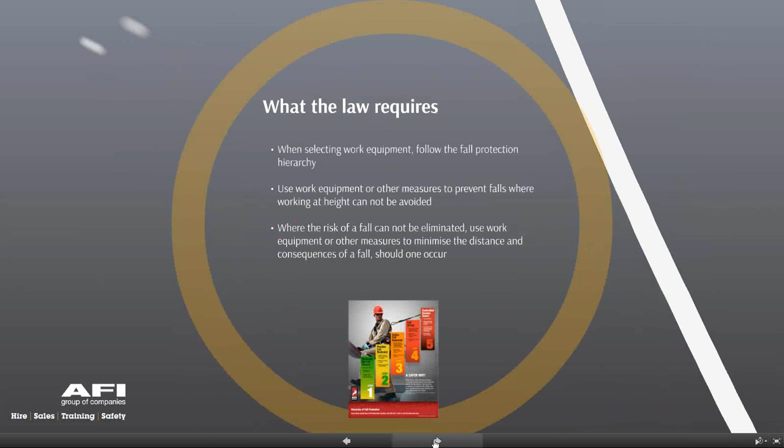So in a nutshell, MEWPs are considered to be a piece of equipment which can prevent a fall. The law states that we must use work equipment or other measures to prevent falls where working at height cannot be avoided. You might be familiar with this new hierarchy picture that's sometimes shown around, or the version that's in a triangle. Irrespective of what it is, we need to understand the hierarchy in its order.

Falls from height are associated with more fatal and major specified injuries to workers than any other kind of injury. That's fact. In the UK alone, in 2013-2014, falls from height were the most common cause of fatalities and the second most common cause of major specified injuries, accounting for over 567,000 lost working days. So massive figures of people not being able to go to work because they've fallen from height.

So, PUWER then, or what we know as the Provision and Use of Work Equipment Regulations. This focuses on minimising the risks from using work equipment. Previously within PUWER, we've referred to areas such as suitability of the equipment, guarding of dangerous parts of machinery. But interestingly, this new guidance now highlights such areas as ground conditions, sloping ground, travelling whilst being elevated, and potential for drop-offs or changes in level.

Quite a different change in tack there from the HSE. They're basically telling you, if you've got these kind of environments around, you need to consider these. Sometimes the environment in which MEWPs are used will constitute a risk. We could be on good ground one minute, then suddenly find ourselves on soft or uneven ground. This can have catastrophic consequences if the machine is not designed to be in this type of ground.

So what are your spill procedures? Have you got procedures in place that are going to prevent that from getting into any type of water course? Also, under LOLER, they do mention the fact that all lifting equipment must have a thorough examination, and that thorough examination for MEWPs has a maximum interval of 6 months.

We talk about strength and stability, and if you look in the LOLER regulations, it will give you a good example and specific legislation on what it means there. We need to ensure that the machine is stable and strong enough. Again, we talk about this competent person, somebody with the training, knowledge and experience. But remember what CDM said if you're in a construction activity. So a little bit different take on that.

In the UK, there are over 55,000 MEWPs. These are all different, from different manufacturers, different ranges, types and models. Some have an ability to work only indoors, where some can go outdoors. So each manufacturer, understandably, is attempting to develop new machines with different configurations, different applications and uses all the time.

Can't blame them for trying to get a competitive edge on the companies they do business with. What we're now seeing is technology working in the manufacturer's favour. Instead of relying on the weight of the machine, heavy robust equipment, they're now relying on safety systems for various aspects. So instead of a really heavy, clunky machine, we've got a lighter weight machine that relies on a safety system. In the 20 plus years I've been involved with the safe use of MEWPs, technology in the last 5 years or so has moved on somewhat, and it's moving on still at quite some pace.

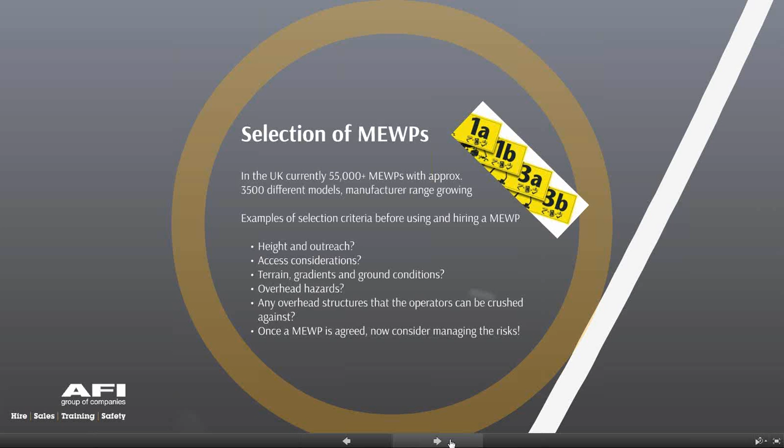Okay, so you've decided on your machine, accepted the fact that this machine is going to be arriving on your site. It's been loaded and you're having it delivered to your location. So this in itself can involve a whole host of manner of issues. Think about the length of the machine, the height of the machine, the width, the weight. This can cause havoc whilst it's being unloaded.

Okay, is there room for the transporter to park up and safely unload? Remember that the delivery driver, when they arrive, under many terms and conditions of hire, are acting under your instruction, and therefore you also have a duty of care to them too, as well as your own employees. So loading and unloading, you need to factor in the fact that basically you take care of that person.

Look, loading and unloading on a live carriageway is unacceptable in my eyes. We get it all the time. People can't even get the truck into site. Consider a person now trying to unload a machine on site. He's got this off here and he's having to take that into site. Just imagine where the basket now will be swinging into the line of traffic, or potentially.

Now the guidance also covers lighting conditions, and again, this is on delivery and collection, because a lot of the time we're delivering out of hours, in dusky conditions or early in the morning. So consider this: there have been a number of unfortunate fatalities to the public over the years.

All right, so consider now that that machine's been unloaded off the back of the transporter and is now being driven into your site so that you can use it tomorrow. What I now cannot see, if I'm a user of the road, is that vehicle's lights. So as I'm coming along the road now, unfortunately it's capable I could drive straight up them ramps and onto the back of the truck. Again, I should be looking where I'm going, I accept that, but that has actually happened unfortunately.

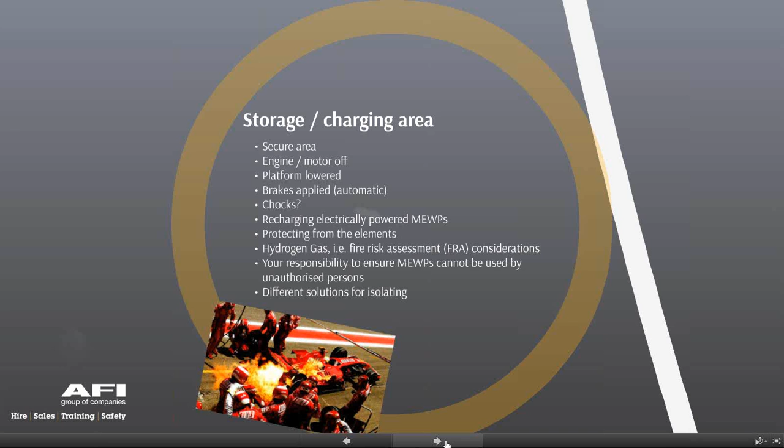It then mentions about recharging a machine in an environment protected from the elements. I agree with that - we don't recharge our machines out in the open if we can help it, with the weather we have in the UK. But I do feel they could have mentioned a bit more here: the gas given off when a machine is on charge is hydrogen - both explosive and flammable. So you've got to consider this.

If I'm charging a number of machines, or one machine, in a small room or an area that's not well ventilated, then I've got gas building up in that area, and that could create a fire or an explosion. That's something we need to consider in fire risk assessments, or your safety department needs to address when charging machines. At the end of the day, we've got to be mindful of these things.

Also, be very mindful of charging leads being doubled up - one extension into another extension. All you're doing is doubling the length, but reducing the actual power at the output. So although you might feel you're going to get a full charge on the machine, you won't. Don't forget as well, charging leads get damaged or run over, and various things happen where people aren't able to charge the machines up properly.

Lastly, the guidance talks about securing machines, which I mentioned at the start. One key can potentially fit 3 or 4 different types of machines. If you had 3 or 4 keys with you, there's a very good chance you could start up a number of machines on site. So once you've off-hired your machine, and you haven't damaged it or caused any problems - it was safe, nobody's been hurt on it, you've left site - unfortunately somebody else can jump on that machine if it hasn't got another method of securing it.

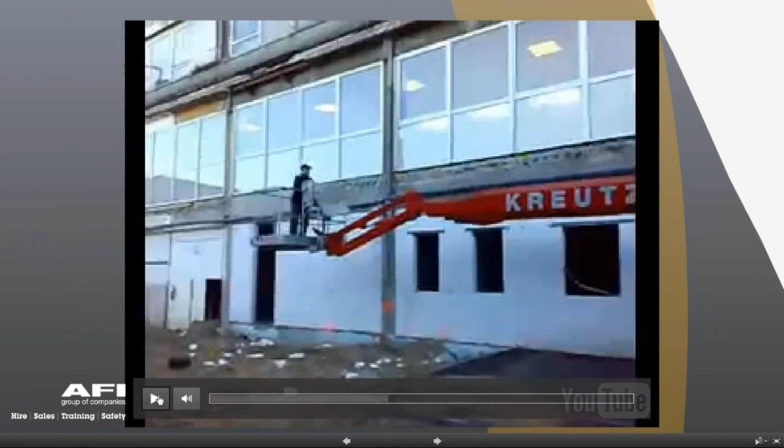Okay, so just go through this. Some of you may have seen this video. I'll let the video do what it needs to do.

Okay, so that video was taken off a well-known social site, as you can probably see, and part of me believes that was potentially set up, but also part of me believes that poor gentleman was asked to take that machine off that slab. So all they've done is taken the machine down probably an 8-inch drop. You can see that when the first two wheels came off there, he almost...

nosedived into the platform, potentially suffering some facial injuries where he headbutts the control panel. But of course he's regained himself, and then by the time he's driven the machine off, he gets the other aspect where the front wheels come down, and that's what gave us that boom flick or catapult effect. No harness on, clearly, and he's catapulted out of the platform, and that guy's going to be suffering some injuries, and I would doubt not serious injuries.

Okay, so let's think about considerations. I talked about wheels, outriggers earlier, and stabilizers. Remember, all types of machines, irrespective, are going to put their weight through the wheels, the outriggers or the stabilizers. Now, boom type MEWPs in particular can impose up to 80% of the full weight on one wheel. So what we might find is a boom type platform may display a very large wheel loading or point loading over one wheel, or one stabilizer or one outrigger. So what does this mean? It basically means the full weight of the machine may almost likely be taken on that wheel or outrigger, so it's considering the worst case scenario.

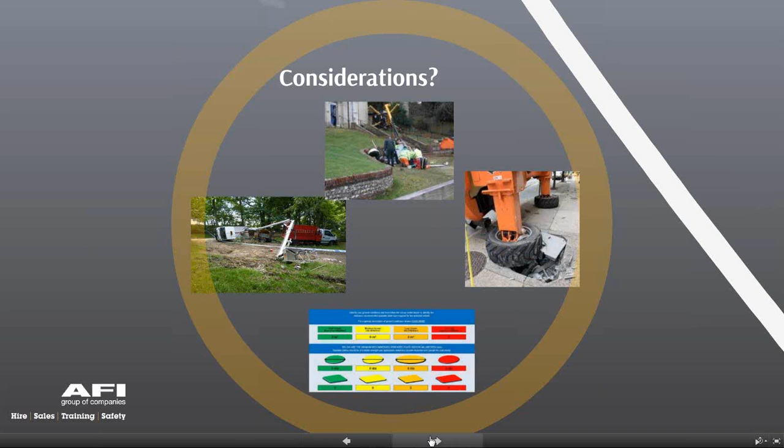I mentioned earlier about the IPAF Ready Reckoner, and there's one picture there from it. But if you go into it, there's a lot more behind that. You'll be able to put in the weight of your machine, the type, look at the type of ground, and get an idea of what type of pad you need to use.

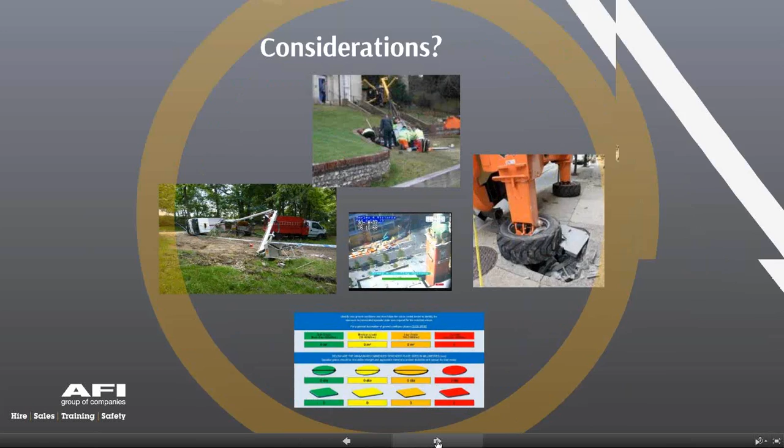Looking at a recent incident over the last couple of years, this one was taken in the UK. You can see the boom working here, the operator's somewhere up here. We've got a scissor lift working here, and the site hoardings there. The guy's now going to be working along. You can see the buses, the traffic, the people going about their daily life, the cars. There's a car at the set of lights waiting for his turn to go through, and away they go.

So the boom's now working, you can see the operator up here. He's looking down at the ground, trying to check. The wheels are turning, and as he starts to turn his wheels and move back, unfortunately for him, something happens. It's just collapsed into a manhole cover that was covered up by ground, and down it goes. You can see all the white stuff come off the basket, that'll be dust from the impact. Now you can see all the people running, some ran in the opposite direction, and if you were looking carefully, there was a person very nearly crushed by the boom who decided to run away quickly.

Secondary incident now, the machine's obviously caught fire, there's smoke coming, scissor lift's descending. The reason I'm allowed to show you this is we use it on our IPAF MEWP for Managers course. The guy survived the fall, he actually eventually lived to tell the tale.

So these are some of the considerations. This was because of a manhole cover that was covered up by aggregate and shingle and shale, etc. The HSE actually prosecuted this company £100,000. Now, I mentioned earlier we've got a duty of care to others, so you can only imagine if that had hit a bus or a car, or gone into another area. Consider that, where that site hoarding was, you're never going to have the ability to cordon off the whole area. But partly why they got prosecuted was due to the underground services not being clearly marked. Everybody okay with that? Hopefully that makes sense.

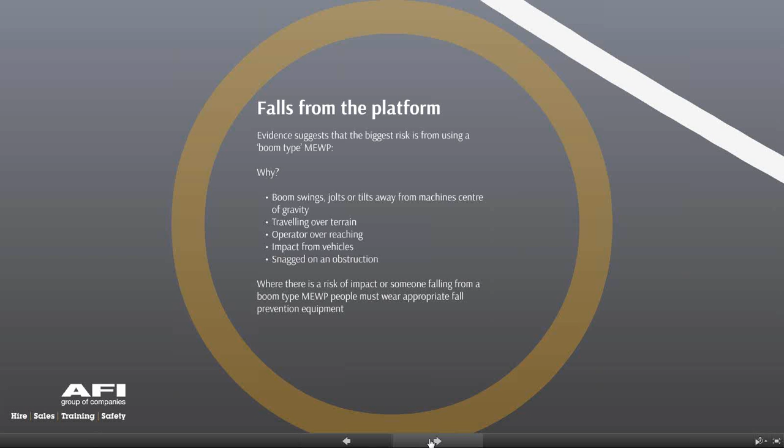There was a campaign quite a few years ago called Clunk Click. When we're in a boom type platform, wear a full body harness with a short lanyard, attaching it to the anchorage point inside the platform. We do not attach outside.

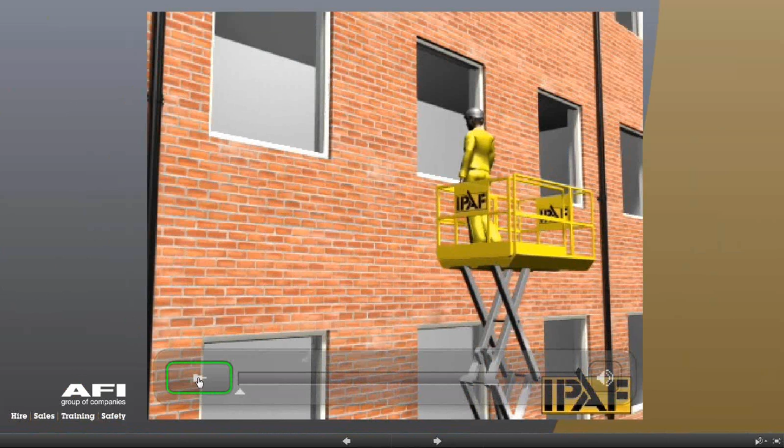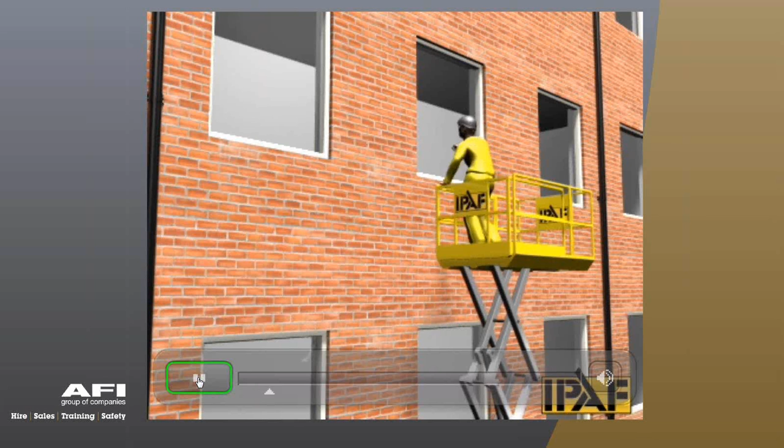Let me show this little video. We've got a vertical type machine here. I don't think the survey's been done very well, if you ask me, because the machine only reaches the bottom of the window and the guy can't reach the top. So this person, unable to reach, takes it upon himself to climb a little higher. We can see a bit of side force, the machine pushing away from the wall, and unfortunately that person has a very bad day at work.

In terms of the standards, the preferred option is to use a proprietary system which restrains the occupants in the platform. We shouldn't use any retractable restraint lanyards unless they are suitable and have been successfully tested in the proposed manner of use.

There are harness courses available which cover inspections and correct wearing. If in doubt, we should refer to the IPAF harness guide. We should be seeing operators wearing EN361 harnesses and EN354 lanyards. If we look at the boom type guidance, it strongly recommends that a full body harness with an adjustable lanyard be used to provide work restraint.

The lanyard should be adjusted to be as short as possible and may contain an energy absorbing device. This includes static booms and mobile booms.

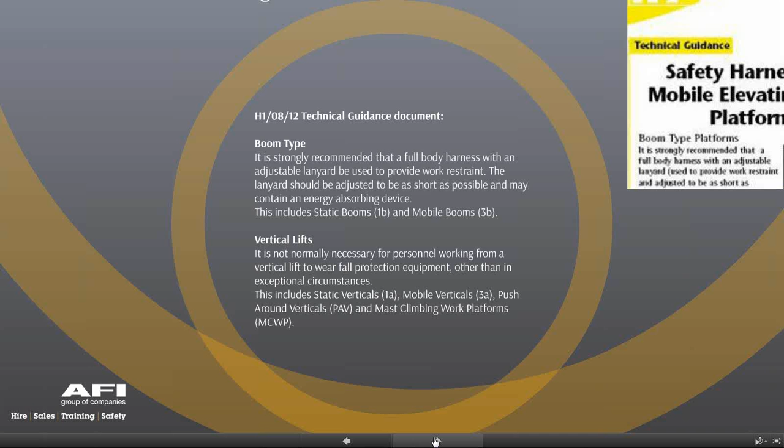For vertical lifts, it's not normally necessary for personnel working from a vertical lift to wear fall protection equipment, other than in exceptional circumstances, which would include static verticals, mobile verticals, push around verticals, and mast climbing work platforms. So guidance is there - feel free to use that and look at it on the IPAF website.

Okay, so overhead hazards then. I mentioned earlier about two fatalities through contact or near contact with overhead lines. If we're going to look at overhead power lines, we need to follow guidance note 6, which is GS6 guidance on working close to or near overhead power lines.

But we also need to consider beams, doorways, trees, bridges. What risks do they potentially present? Well, clearly there is a risk of crushing or getting caught between. So what effects could that have on the operator? What effect on the user? What about other people in the platform? But of course, what about the rescuer?

So what control measures do you require? Have you got some means of doing that? Have you marked it out? There are additional MEWP devices now that are available.

So we've got a couple of guys working in steelwork there, very close to the steelwork - look at that. That's an everyday occurrence in the UK. Only one wrong move, and they could be completely pinned against the controls.

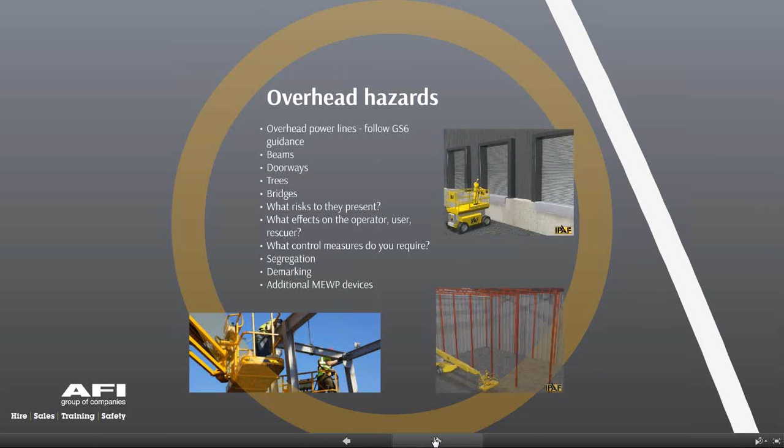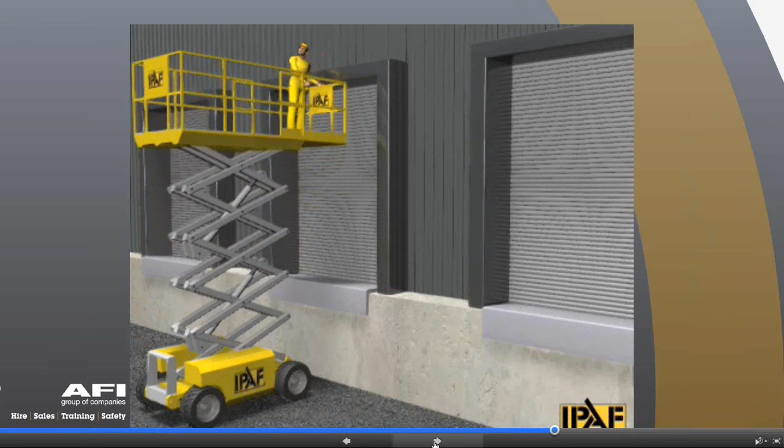So to further highlight this, here's an example. We've got someone not looking at what he's doing - up he goes, makes contact with the guardrail, potentially causing a hand injury. Or he lowers down the machine and lowers it onto something. I've seen that happen before.

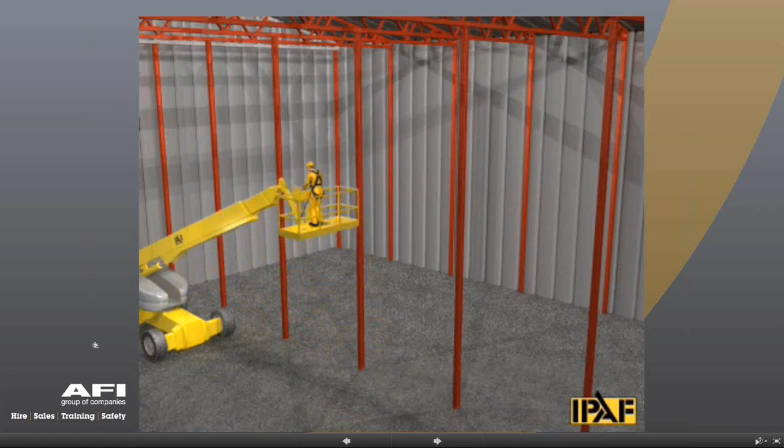And of course we've got the operator now fixated on the controls, making sure he operates the right control, not really aware of his surroundings, lifts the machine up and unfortunately makes contact with the steel beam there. That would be a crushing injury, or what we would call a sustained involuntary operation - he can't let go because his body, his torso, is pressing on the controls, pushing them away, and effectively he can't actually lower the machine back down.

So, trapping and crushing. The previous industry phrase was anti-crushing or anti-entrapment devices - a very important subject. As we're putting these people in the machine, the guidance has basically said duty holders should assess if MEWPs need to be fitted with secondary guarding devices.

So although we're referring to the word secondary guarding there, what we have is primary guarding already built into the machines. Those of you who have used a machine before will understand what I'm on about. To operate any control in the machine, I've either got to put my foot on the foot switch, hold a trigger, or press an enable button. That's primary guarding - it's a two-pronged attack.

So often on some machines, there are collars - I've got to lift the collar up before I can engage the control. Again, that's primary guarding. So this is why these anti-entrapment devices have now been replaced with the word secondary guarding.

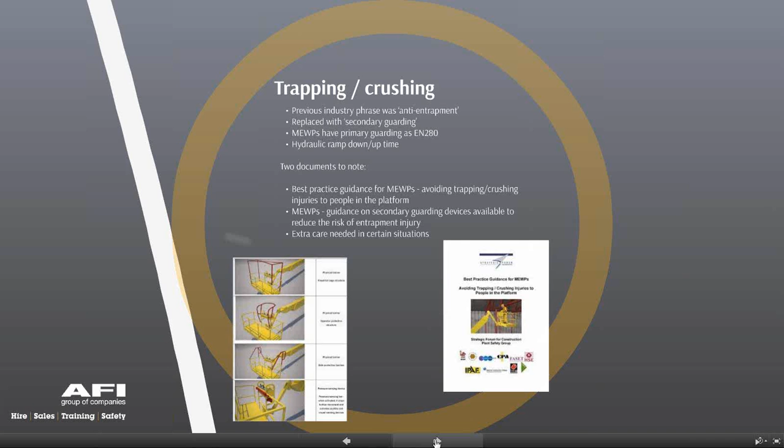Okay, exiting the platform at height. MEWPs are designed specifically to lift people, and the guidance is given in the code of practice, BS 8460. They're specifically designed to lift people to a position where they can carry out the work from the platform and then return to the starting level.

They are not intended for the transfer of people from one level to another or exiting the work platform at height. However, Annex B of BS 8460 does state that exiting the platform at height may only be undertaken when a rigorous risk assessment is carried out as part of the planning. It considers things like falls, falling objects, tools, sudden movements, potentially additional loads imposed on the machine, and dynamic effects.

So I would encourage you, if your people are climbing out of platforms, to have a look at this guidance and see what it says, because once the risks have been assessed, measures should be devised to reduce the risk to an acceptable level, and a method formulated so that a safe system of work can be put in place. People need to understand it.

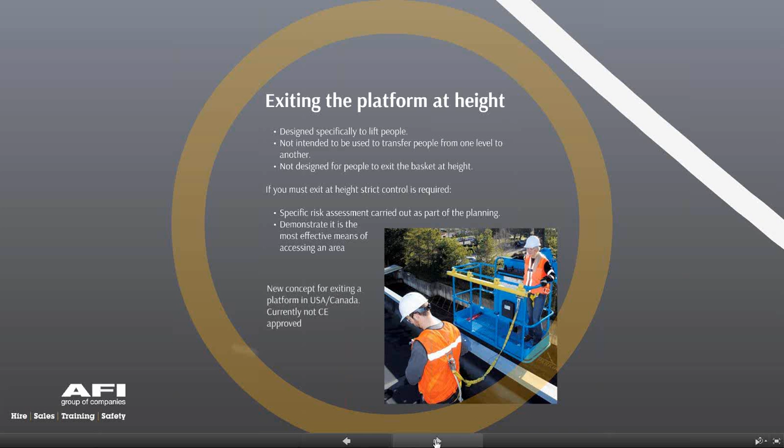Just to whet your appetite, there's a new concept now for exiting a platform. This has been approved in the United States and Canada, so it's not currently approved for CE, so we can't use it in the UK. But you can see here one manufacturer's taken that to another level - we've got an operator who's climbed out of the platform and he's got a running line now on that basket. I can't say any more than that. Not approved for the UK. Don't do it. It's not something I would encourage you to do at this moment in time.

Trained operators are responsible for checking the MEWP prior to use. This is a daily check and should be carried out if taking the machine over from one operator to another, or even if returning to a machine after a break. I know most operators probably won't recheck a machine after lunch, but a cautionary walk around the machine to ensure it's as it was before they left would always be worthwhile.

So again, how do you record your daily checks? What form are you going to use? Where is it kept? How up to date is it? Is it something you've found or borrowed or taken out? I would advise, on the left hand side there is a free downloadable example on the resource sections of the IPAF website - the International Powered Access Federation. This document is free to you. You can see it's got Monday, Tuesday, Wednesday, Thursday, Friday and so on, with all the checks you should be checking on a MEWP prior to using it.

So what's the procedure if a machine is faulty or potentially develops a fault? Operators who attend an IPAF operators course are taught to isolate it, tag it, and report the fault. So make sure they push all the e-stops in, remove all the keys, and put a big sign on the machine letting others know that the machine is at fault.

With regards to examinations, you're probably aware there is a requirement to carry out a thorough examination at intervals not exceeding 6 months. This must be carried out by a person who has been deemed competent. Make sure you have evidence that the machine is currently in date. Now, most companies have their own login systems now where you can gain access to service documents, pre-delivery inspections, and thorough examinations.

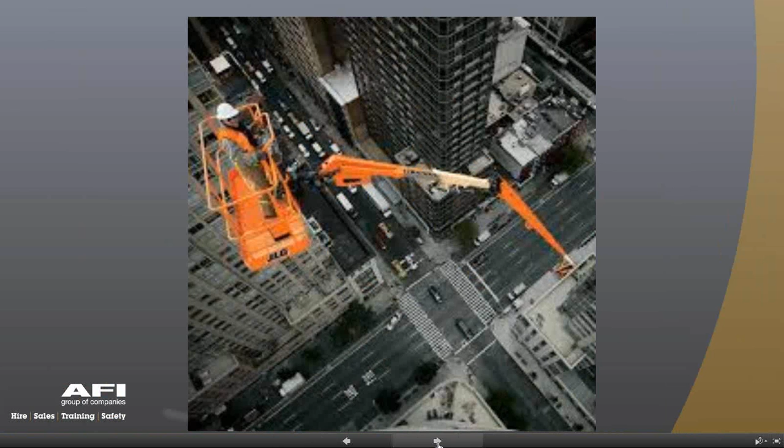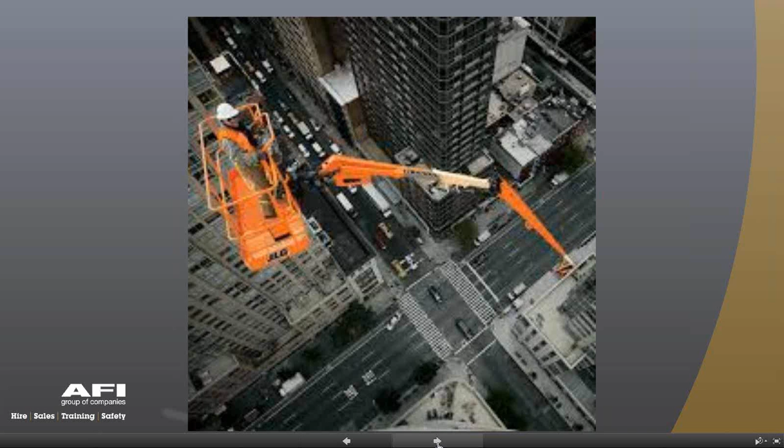Whereas now we have a 185-foot boom, and that has the capability to drive 185 foot in the air. I don't know about you, but I probably couldn't even see the ground from 185 feet. So how can I understand the different terrain, the ground? Not decrying the machine - it's fabulous - but you've got to have procedures in place to make sure these are used safely.

So we're getting on to emergency rescue plans now. We need to identify the following: have we got a nominated person in place who is site-based and on the ground? I'm certain you have good rescue plans in place, but without doubt, some of the most overlooked areas I have found are things like controls not being accessible at ground level.

What I mean by that is the machine has been parked along the side of a wall, and maybe there's materials that are potentially stopping you from getting access to the ground controls. I mentioned earlier, and you saw the video of the slide-out deck over an obstruction - basically that person cannot lower the machine because they may be incapacitated, but the person on the ground may not be able to retract the scissor lift deck to get it down.

What about the panel not being able to be opened to access hand pumps or emergency pumps at ground level? What if there's no person available? I thought my ground person was there. He wasn't there, and doesn't know how to operate the ground controls, or there's the unfortunate situation where they operate the wrong control, believing it to be right, and make the situation worse.

So instead of lifting up, they lower down. Instead of telescoping out, they telescope in. These are all factors that have come across before, where unfortunately people have done what they thought was the right thing, thinking 'I'm going to help them out,' and actually made it worse.

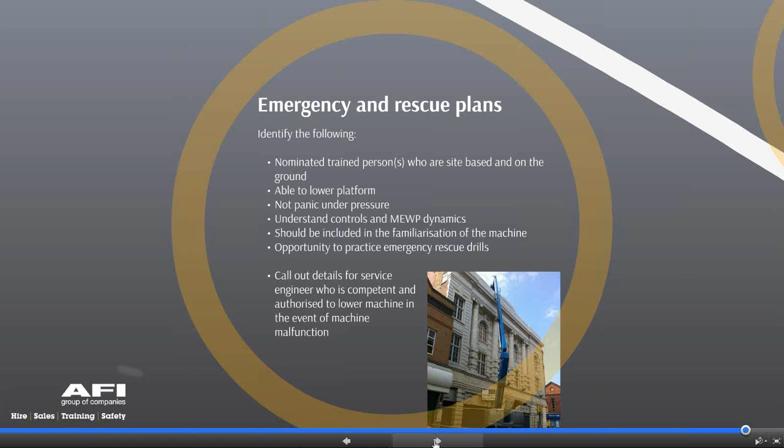So to summarize then, we've gone through some statistics and looked at why the new guidance was introduced and who it was aimed at. The legal side of things - there's much more legislation you need to be aware of, but that's the minimum requirements. We've also looked at what we should be looking at when we're selecting a MEWP and making sure it's the right type of machine for the area we're going to work in.

We've also looked at delivery and collection of the machine, some of the factors involved in actually collecting and delivering. Remember to think about security of the machine, because often these machines are dropped off at early hours or late in the day. Refueling and recharging - don't forget about the fire risk assessment. Remember, it's hydrogen gas that's emitted on charge if it's an electric powered machine.

But if we're refueling machines, it needs to be done safely. Ground considerations - weights, point loadings, considering things that can collapse that maybe weren't designed to take the weight of the machine. Falls from height - statistics show it's still the single biggest cause of fatalities, but we need to ensure that people are wearing the right type of harnesses and lanyards when working from boom type platforms.

Overhead, we've looked at some of the issues surrounding this, and clearly there are devices out there now, what we call secondary guarding devices, available if we're putting people in the air close to overhead obstructions. Remember, the Health and Safety Executive, if you've got an incident like this, they are going to be expecting that you've considered secondary guarding devices.